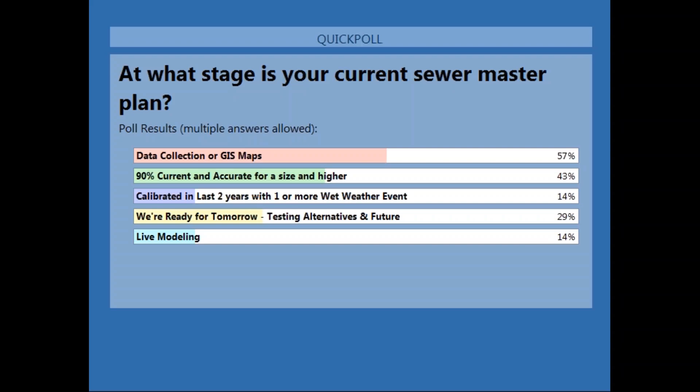Okay, all right. So we want to take this opportunity in the webinar to begin to describe some of the collection system master planning, some of the tools that Innovyze has to assist you, whether you're a system manager or a consultant tasked with that effort around your sewer collection. We see, as Innovyze, the concept of a digital twin being an important concept, so we'll introduce you to that topic. We'll talk a little bit about how to build a digital twin of your existing system, help you plan for some future growth, or assist you in your management and maintenance of that master plan.

Hopefully saving some scant resources. To do this, I think we're going to look at InfoSewer, as well as InfoSWMM, and how those two tools will help you in that capacity. So, what is a digital twin?

As a father of twins, a digital twin is our representation of that physical asset, typically hidden underground. We've created a digital element.

This concept dates back to maybe 2002, but Gartner, a research and advisory firm, has put it in the last 2 years as one of the top 10 strategic technology trends in 2017 as well as 2018. It's something that has increased steadily year over year. Wikipedia indicates it's just a digital replica of the physical assets, the processes and systems that can be used for a variety of purposes. I think that's the element we want to talk about: how in the short term that digital twin can help us not only with what assets we have, but how those perform and how operations and what we can do to provide insights into that.

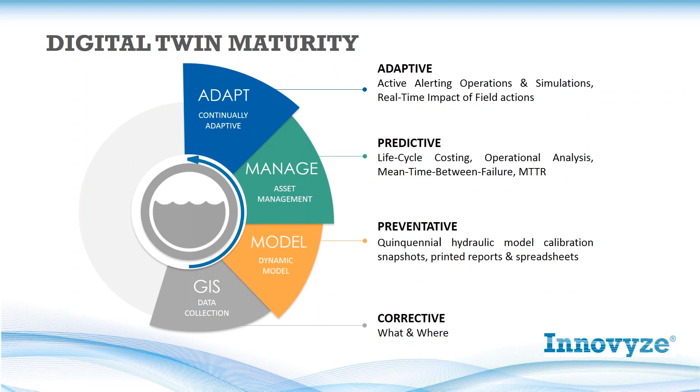Thanks, Matt. That was a great definition of digital twin. When thinking about master planning, I've seen that each master plan is really unique compared to the utility or the city that's involved. They all have their own goals and visions. Some might be technical, some might be more public facing and addressing the issues of the day, sometimes political as well. The regulations that the state, even federal, regulations are going to come out in that master plan in the way that it's been set up.

For example, we have a local report that indicated they pursued their master plan for the following reason: a new hydrologic and hydraulic model and guidance on the capital improvement needs of the collection system are required as part of prudent planning for the future and for the continued reliable and effective sanitary service to the community.

One item to note is that we've heard from our asset management folks here at Innovyze and the people we've reached out to in this market, and they've mentioned how important it was to have active master plans and asset management plans so that they were able to get better bond ratings and have a lower cost when it comes time to putting in their capital improvements. When they go to get the monies, they got much better rates if they had very current active management plans for their sewer systems.

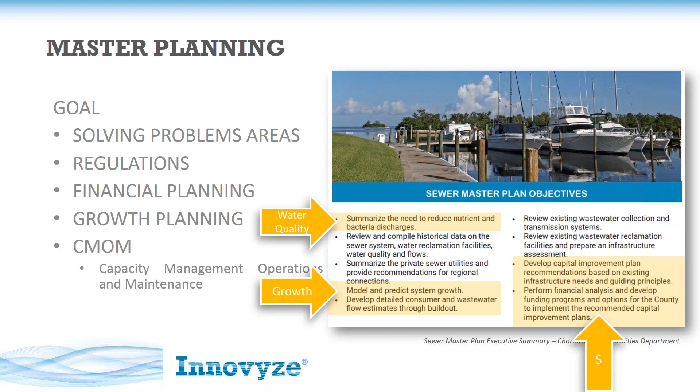And of course, ultimately, all of this master plan is used in that financial analysis that needs to be performed in order to make the improvements and keep high levels of service.

A sanitary sewer master plan, as we've talked about in that progression of the digital twin, is going to start out with a physical condition of the network. The assets are going to be built, hopefully built into a hydraulic model, going beyond GIS. The reason that's important is there's a new level of quality in the data that I find once it gets into a hydraulic model. A hydraulic model is going to impose on the system that the data makes sense relative to each other.

For example, there isn't anything wrong with a 36-inch pipe as a value for that field. However, if it was connected upstream and downstream to a 12-inch, it's probably a data entry error. And it wouldn't be called out until you've put it into a hydraulic model. Perhaps it will give a very strange result, or maybe even an error or a warning message. So we really like that the data gets into hydraulic models and it gets further fine-tuned.

Of course, the sanitary sewer master plan also comes into play for assessing the current state and then setting maintenance programs in place, and then using things like scenario manager of models, we can look at future planning for that capital spending.

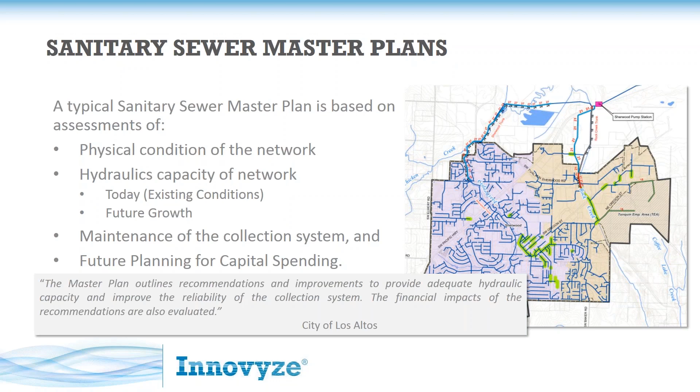At Innovyze, we have several products that operate in what we call the storm sewer flood family. This webinar, we're really concentrating on two of them though: InfoSWMM and InfoSewer. We've got Carolyn on with us to do some presentations of both InfoSewer and InfoSWMM along the lines of our subject today of master plans.

The first step, as I mentioned, and the base, is really collecting the asset information, what and where, and then taking it into a hydraulic model and evaluating it based on infiltration and inflows, the loads that go on this system. The infiltration inflow being the wet weather loads, they're more transient, right? We have dry weather flows, but we have wet weather flows as well.

In this image that we've captured, actually this is local, this is Oregon City, not far away. In fact, Matt lives nearby, I think just one side of the river versus the other.

You can see in this one that we've got some areas that are modeled, the ones in green, whereas the smaller sizes have been excluded from the model. They exist as part of the asset registry, but they're not part of the model. And this is something that I've seen over my time at Innovyze, that perhaps for financial reasons or model limitation reasons, we just model the large trunks and we don't model all the others. I would think that over time this should diminish because of the ease of building models.

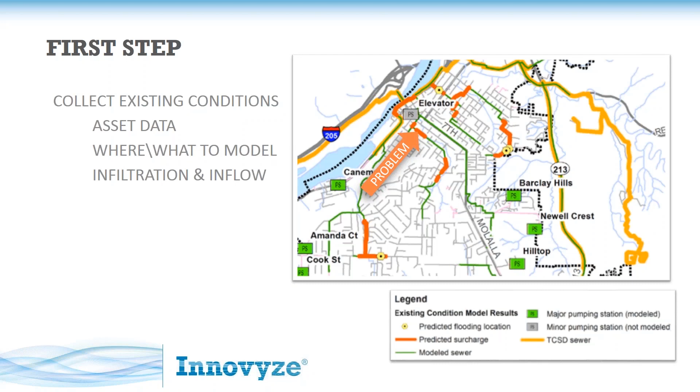At the upstream manhole of every link, we're looking at the depth of flow to the diameter of the conduit. Obviously, a d/D value more than one means that it's surcharged, and that's usually an issue in a sanitary sewer. Really, over 50% full doesn't leave us a lot of capacity for wet weather events that may come, and even future growth.

So instead of changing the pipe size every 5 years, which is quite expensive, you may anticipate based on your planning areas of growth, and initially perhaps you have really low d/D values, 10, 15, 20%, and then ultimately after several 5-year periods, perhaps you're getting more to the full capacity of the sewer system.

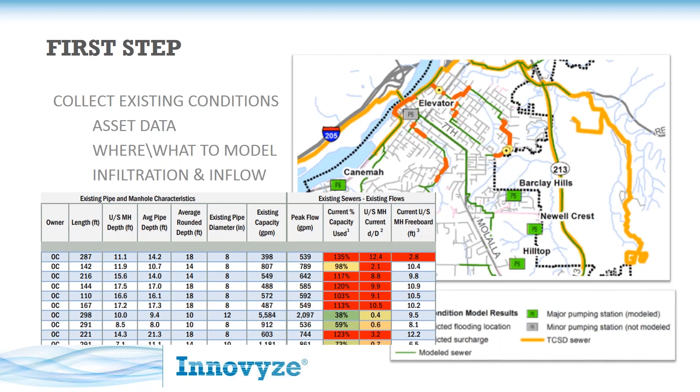So we're going to turn some time over to Carolyn to do a demo, especially based on this idea of building the model from GIS. She's going to do this in InfoSewer, and an InfoSWMM demo will follow later on in our webinar. She's going to demonstrate importing this information through a GIS gateway, which is a common tool to InfoSWMM and InfoSewer, look at allocation of loads, and then in a scenario situation, show a comparison of what will happen after we build out an area, looking at that idea of growth.

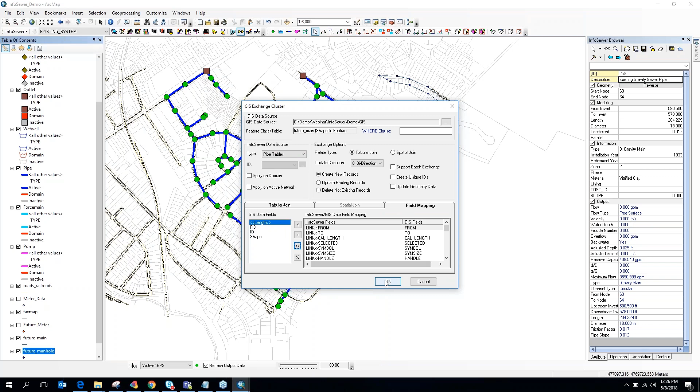So let's select create new records and do that one more time, that pipe table. I must have clicked out of it. So let's AutoMap. So let's select future main. Okay, and then we'll click load, and load is basically now we're telling it, so let's load these shape files in.

Okay, so it looks like our manholes were not imported. So what we're going to do is we'll go in, select edit, create new records. Oh, I had changed this to manholes. So let's delete these pipes. Okay, let's try that one more time. So we'll go back into GIS Gateway, and basically what I'm doing is just making sure there's no duplicate IDs and re-import.

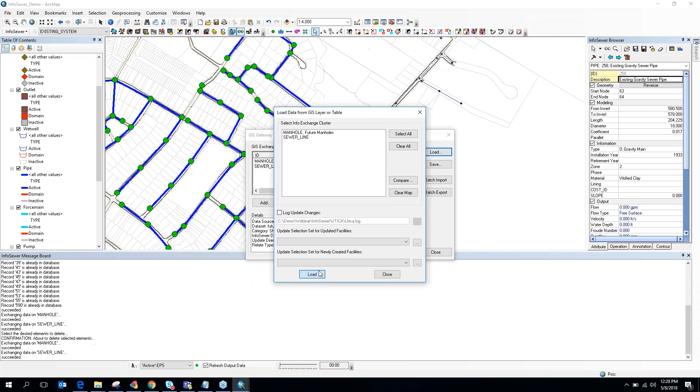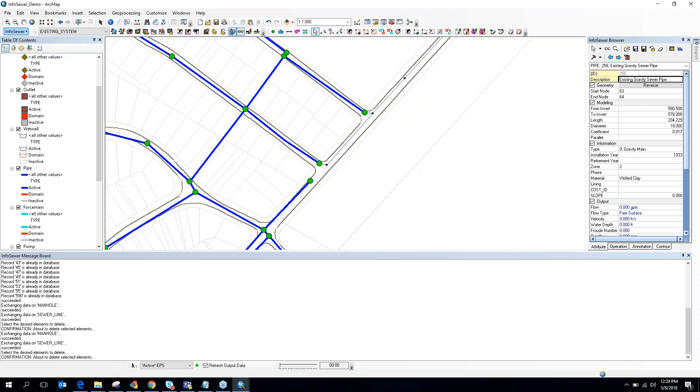So that was successful, and if I zoom out, it should add in, did I not change that to pipes? Let's, third time is a charm. So let's try that one more time. Make sure that I have manhole selected here and future manhole layers. So that's what I ended up changing. And then let's make sure we have edit pipe tables. Perfect. Okay, let's load that in one more time.

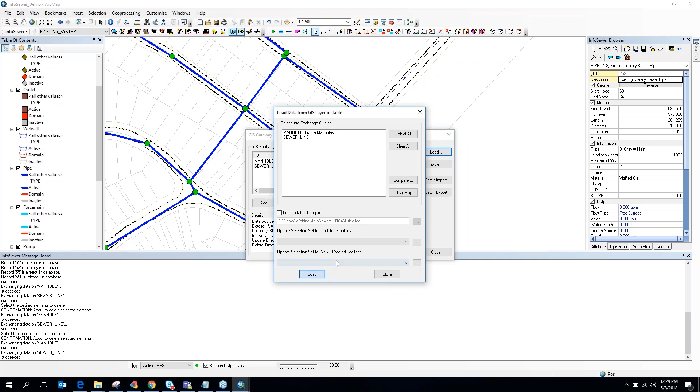Okay. So now if I go into each pipe, I can see that I have all my diameters, lengths, inverts. If I look at my manholes, I have no diameters or rim elevations added or any loads. So we first have to implement that into InfoSewer. So the best thing to do would be create a query to then establish what is the future system. And this section here is our future development.

So what I brought into the pipes were year of installation. So let's create a query for year of installation. So basically I'm creating this query to pull into the domain all pipes that we're deeming as going into the ground in 2018. So if I add that in and validate it, I can press save, okay, and then I can add that to the system. Make sure we have those year of installations.

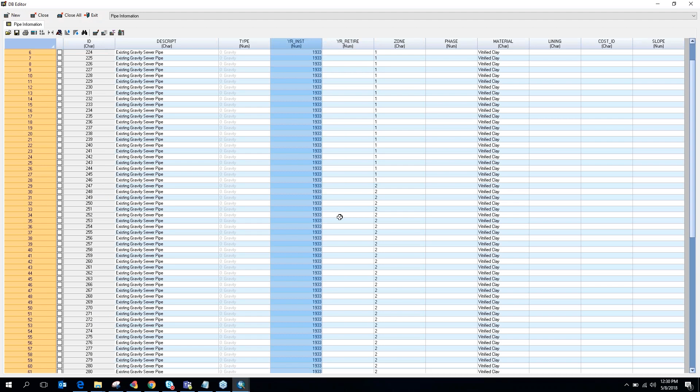So if we go to, so we are in an existing base scenario. So now if we go in and add that into, that should add it into the domain. And domain is basically a selection. So now I want to select those connected nodes. And we're going to go ahead and run our fill link connectivity, which would then connect the endpoints of those pipes to our manholes. So when I go in and select connected nodes, that will then add it into our system. So now I can basically create a selection set that is all of our future system.

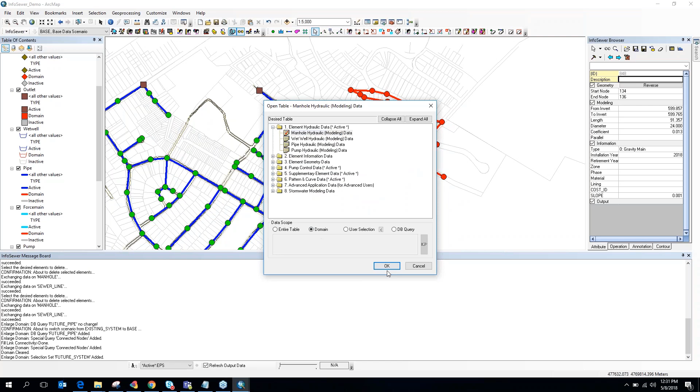Load the domain, say okay. If I clear that and add it, you should see it still adds up. So now I need to go in and add in that manhole information for that future system. So I'm just going to basically group edit and put in 4-foot diameter, and then I'm going to add in a rim elevation of 630 feet.

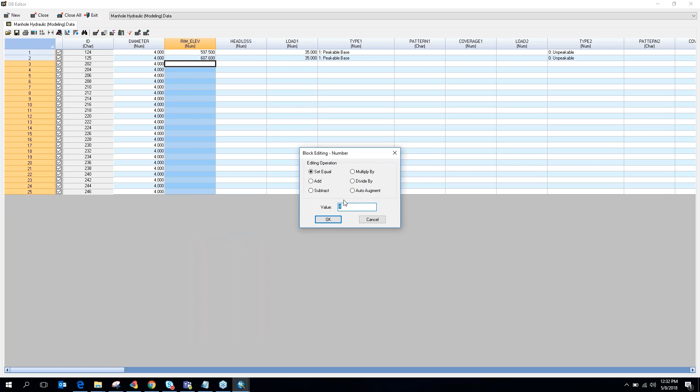So the last thing I have to add in is basically my loads. So I have no loads for my future system. So what I'm going to do in the purpose of the demo is basically use meter information and allocate the demands based off the meter information. And I'm going to use our load allocator tool that comes with our suite extension.

So the load allocator tool pulls up a toolbar, and in this toolbar there's several allocation methods we can use. I'm going to use closest pipe, which basically says it's going to allocate to the closest pipe and then either evenly divide it up to the manholes or basically allocate it to the closest manhole, which is what I have selected here. I also want to select apply to pipes in domain and assign loads to manholes in domain, because what this does is basically not override any of the loads I have in my existing system. I just want to upload any loads to my future system.

So I'm going to select future meter. I'm going to select dry weather flow, which is where my dry weather flow is applied in the GIS information, and then apply this pipe field.

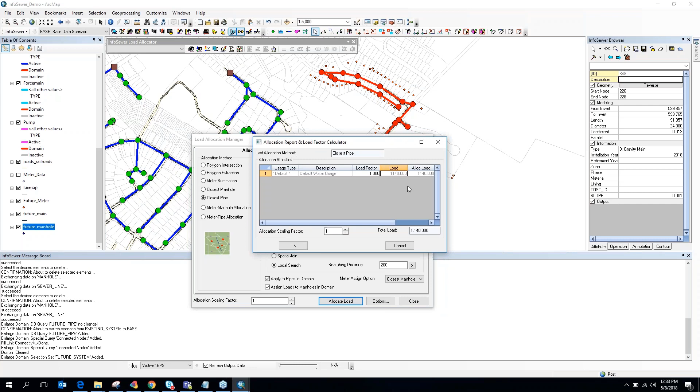And the pipe field, what it basically does is it will tell in the meter file, it will input what pipe that meter was allocated to. So you can go in and change that later if you'd like to. So I'm going to press allocate loads, and you can see I have about 1140 GPM of dry weather flow that was applied to my future system.

So now that I have done that in my base scenario, my next step is to then create a future system scenario. So I have an existing system scenario already created. So my future existing system, let's check to make sure the nodes are okay. So let's make sure that they are connected properly. So let's go into our existing scenario and take a look at this existing system.

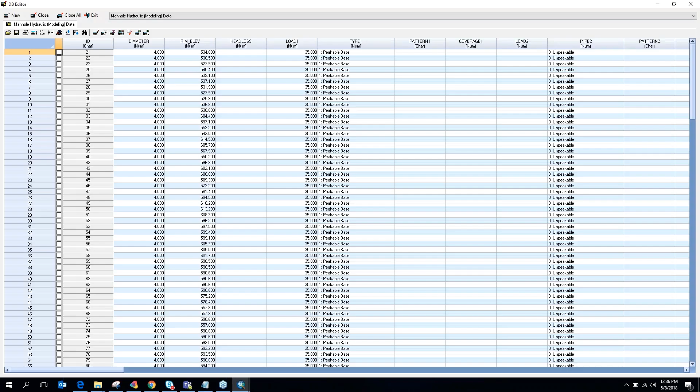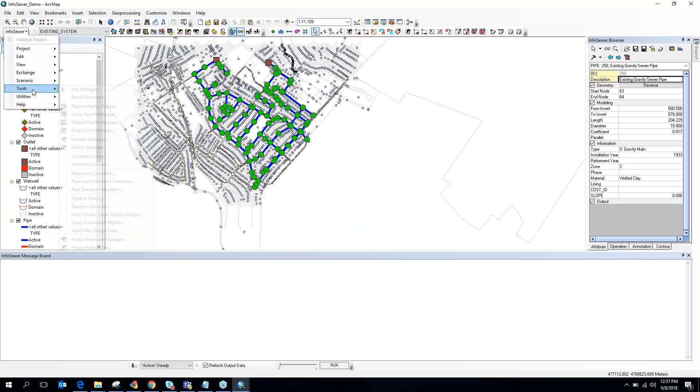So basically, I'm going to do that really quickly and import that information one more time. So if I switch to future main pipe tables, ID, and map over everything, and let's make sure that all the fields are mapped over. That's perfect. And then we'll load. Okay, so our future system is in place.

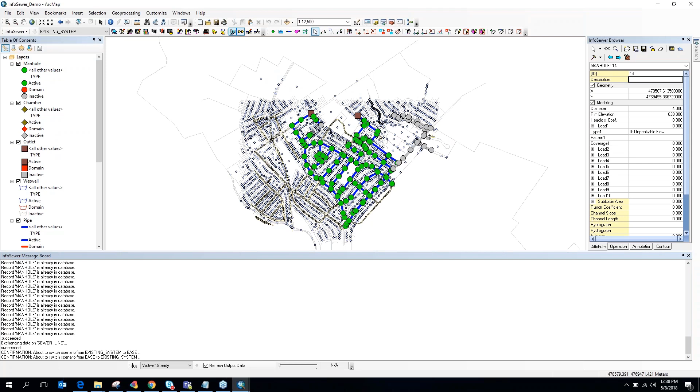And what I want to do is basically switch back to base and then our existing system. And that turns off all of our system here on the right. So what I'm going to do now is then create a future system scenario that will then activate this future system. So if I go into my scenario explorer and I create a copy of my existing system and then create a child to the base, I can call that future system. And then activate that scenario.

It's using the query set that the facility manager had. So what I first need to do is go into that existing query and then create a future system. So I'm going to add in my existing pipes because obviously I want to bring in those pipes. And then I would create a future pipe layer like I did before and add in just the pipes that were brought in with year of installation in 2018. Save, OK, and now I have a future query set. So then I can go ahead and activate that scenario. And you can see that now all the pipes are now active for that system.

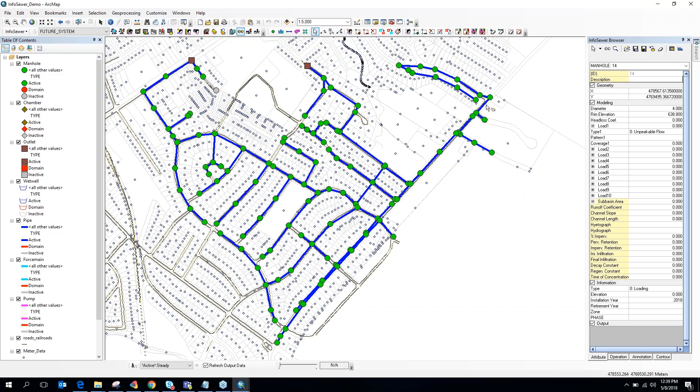So if I go ahead and run the simulation, actually, let's make sure that I added in all of the loads. I don't think since I closed it that I have loads added in. I don't. So let's go run through that allocation code one more time. Allocator. So we'll select dry weather flow and allocate demands. So I'm going to go ahead and run that simulation. And now we can go ahead and look at a report manager, oh, I ran steady state. So we want to run EPS simulation.

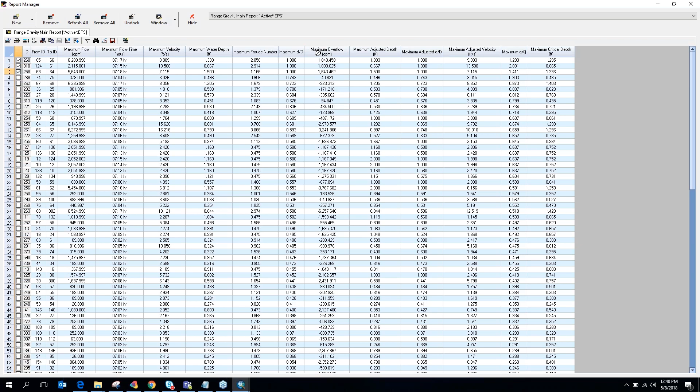And then we're going to go into the EPS range gravity main report, and then take a look at the d/D. So you can see here we have 3 new pipes that have reached capacity in our existing system. And the best way to look at that is in a selection set that we can create based off those 3 pipes, and we can close this table, go into the selection set and press add. There we go. So it shows those 3 existing pipes that now have reached capacity because of our future development.

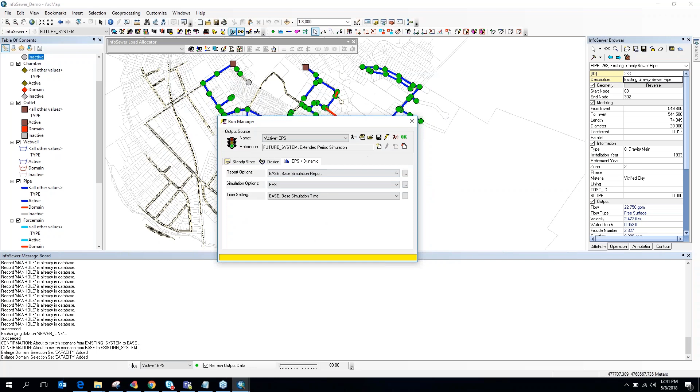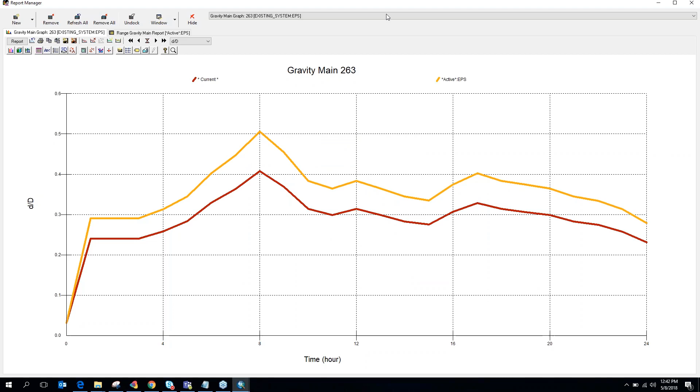So we can also go take a look at the outfall pipe directly connected to the outfall and see where we are in capacity with regards to the new development. So we're going to add in that existing system and then press OK. And so if I select this pipe here and I go to the graph, it will show me a graph showing me the d/D over time. Then I can go ahead and select my future system, and you can see that I have a little bit of increased d/D at that outfall. I'm still looking good, but that future development has added some capacity to that pipe.

So the last thing I wanted to show really quickly was, after you've gone through that exercise and seen that you do have pipes that have reached capacity, you can then use our design tool that will select based off an analysis criteria. So 12 inches or less, if the pipe is above 0.5 d/D, then it's going to pull that in as a pipe that needs to be replaced.

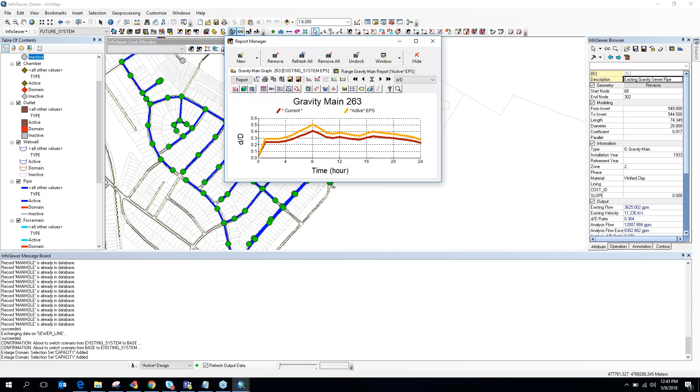Then you can use your design d/D, which basically says you want to design the new pipe to be within these capacities. And then the replacement cost curve will give you a cost per linear foot that will cost out how much it's going to cost to replace that pipe. So if I go ahead and press run, and I go into my run manager and select new, I have a new report that's created. And then I can take a look at that.

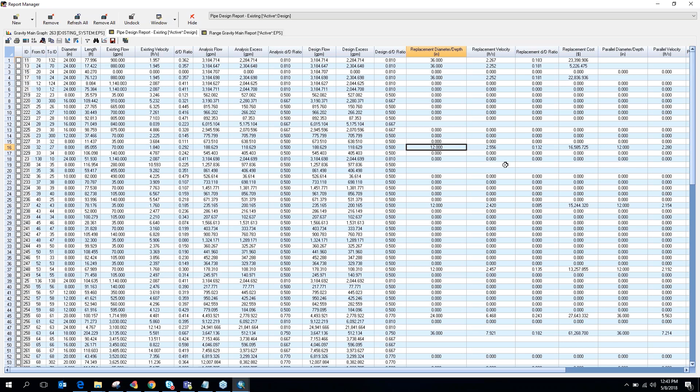So you can see here that pipe 228, InfoSewer is recommending that it should be replaced based off that d/D analysis. And the replacement pipe should be 12 inches, and the total cost for that pipe should be about $16,000. So I'm going to turn it back to Tony to continue going through InfoSWM.

Great, thanks for that InfoSewer demo. Actually, I didn't really mind the repetition because I'm pretty new to it, and it really makes me think about how awesome the scenario manager is. We use a scenario manager for future conditions all the time. It's really quite logical, but I see the scenario manager in InfoSWM and in InfoSewer as really being a tool where you can be quite creative.

So not only do we look at population growth, tying in a new system, but it could be quite diverse. For example, let's say you have an area that has a lot of septic system failure. There's a lot of groundwater contamination because of old septic systems. You're deciding, okay, we're going to sewer this area, we're going to try to make some improvements. Well, it's quite easy to allocate loads like we've shown and get a handle on that.

For example, what about patterns in the flows? Let's say you have an option: send the sewage to a regional facility or one of your own that has capacity. Maybe they've got different costs per million gallons that you're treating. Well, if you could add lines and divert, then this is really going to be beneficial. A scenario where you're just changing flow directions, for example.

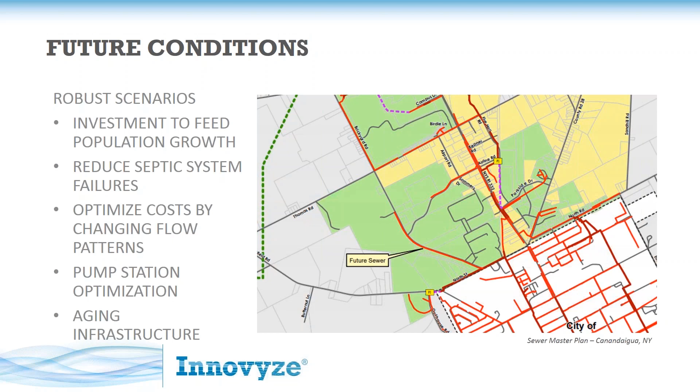So we've talked a little bit about InfoSewer, you've seen a demo, but we also have InfoSWM. How are they the same? How are they different? Well, I just have a few things to mention about that. So they're both obviously for sewer collection systems. InfoSWM has a much stronger stormwater component, with many different hydrologic methods that can be used.

While both of them operate as a full GIS integration, an extension to ArcMap, and can handle city-scale models, it really comes down to the hydraulic analysis as well as the ability to handle stormwater in a sophisticated way. InfoSewer uses a steady state peaking factor type approach. It's really good for sewer systems, the design of them, when you're not expecting lots of surcharge.

In the case of InfoSWM, it's using the EPA SWMM engine, SWMM 5, and it's able to model full dynamic waves. So the storage effects of conduits, system backwater, even flow reversals. So if it's a complex sewer with lots of loops and so on, then InfoSWM would really be the most appropriate product for you.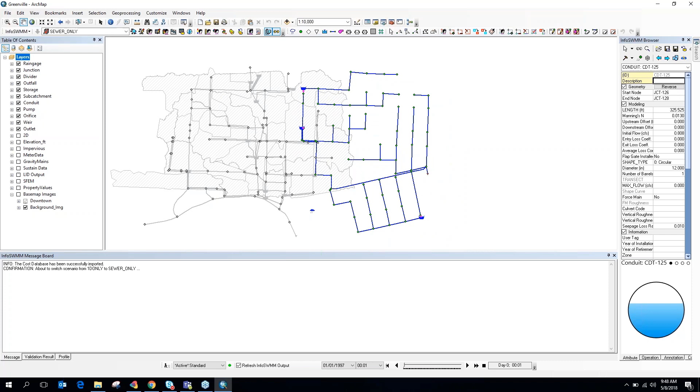One thing before I start: you can actually import InfoSewer, H2OMap Sewer, and InfoSWMM or H2OMap SWMM directly into InfoSWMM. So if you have an InfoSewer model that you then want to apply to InfoSWMM, you easily can import that.

There are just a few things you'd want to check while doing that import. First, flow units - make sure they're set up the same way as in InfoSewer, which you'd select here. So if the loads are in GPM in InfoSewer, make sure GPM is selected here in InfoSWMM, because it won't automatically convert it. You also want to make sure your pump settings are set up properly in InfoSWMM to correlate with InfoSewer.

If you have any short pipes in InfoSewer, you can use our conduit time step for conduit lengthening option - our default is 5 seconds. The best way to confirm everything's been imported properly is to run both models and compare system loads in InfoSewer to total inflow in InfoSWMM. That'll give you a good understanding that InfoSewer has now properly been imported into InfoSWMM.

InfoSWMM also uses an enhanced form of the latest EPA SWMM simulation engine, and it uses these process models. So if you're just doing a sewer system in InfoSWMM, you can remove rainfall runoff and just select dry weather flow, RDII, external inflow, and flow routing. It will just run these process models and take a look at those while running the simulation.

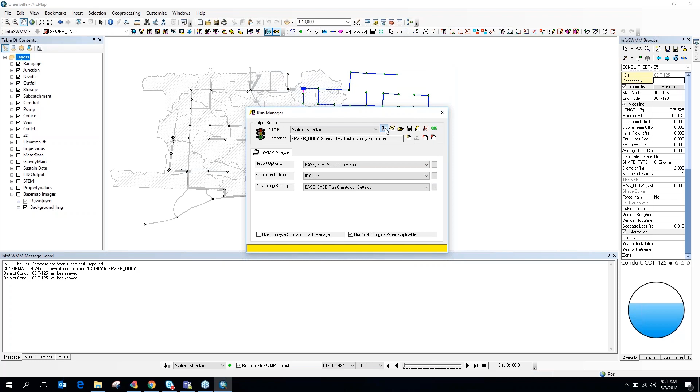So if I close this and go ahead and run my simulation, I will now have results just for my sewer system here. Let's take a look at what information we actually have set up on our manholes, and then check to see if we have any flooding in our system.

If we go ahead and select a manhole - dry weather flow is applied in InfoSewer to the manhole hydraulic table, and you have about 10 loads that you can apply there. It's a little different in InfoSWMM, where you'd select the hammer tool drop down, select inflow, and then you have 3 tabs: the first is external flow, then dry weather flow, and then RDII. So you can have an RDII RTK hydrograph applied for each manhole.

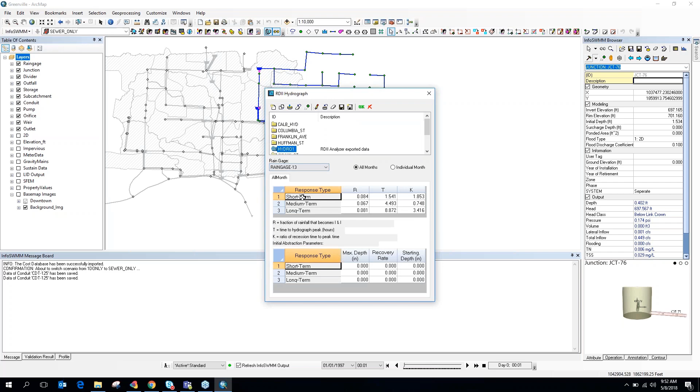You would apply basically a rain gauge, so that's your observed data, and then your RTK parameters that you have calibrated specifically to the observed data that you have for this manhole.

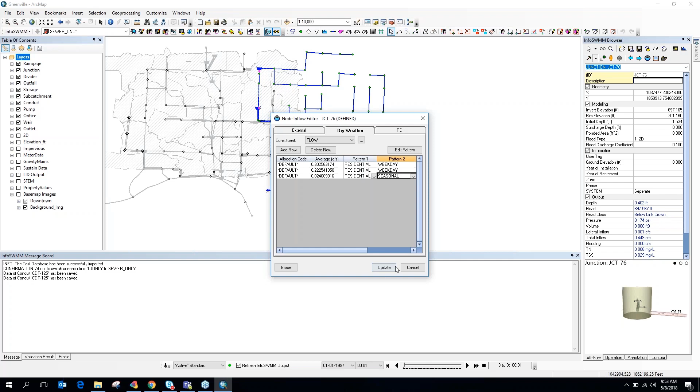Then you can go in and apply dry weather flow. You can see here you can have multiple rows of dry weather flow applied to each manhole, in this case because we have a couple weekday and seasonal patterns. But if you had, let's say, a residential flow, employment, or commercial, you can all set that up with its own allocation code, its own dry weather flow, and then input its own pattern there. So you have 4 patterns that you can implement to each dry weather flow. That's how that information is applied in InfoSWMM.

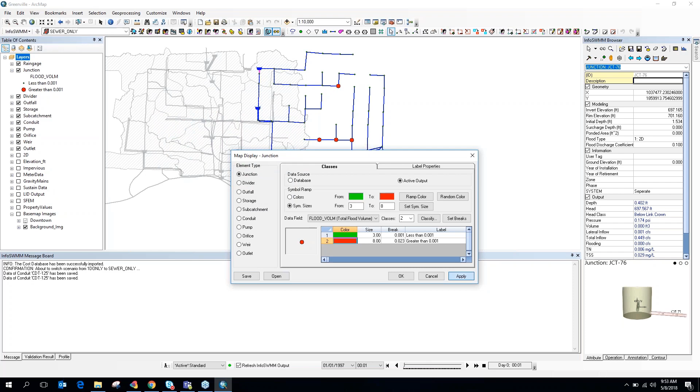Now let's look at our system and do a little analysis to figure out if we have any flooding. I'm going to use a map display option here and classify 2 breaks, just to see if we have any flooding. Obviously it's a sewer system, so any flooding is bad. Let's apply this with a red color, so anything higher than 0.001 we're going to apply. You can see we have 5 locations in our sewer system that are experiencing flooding.

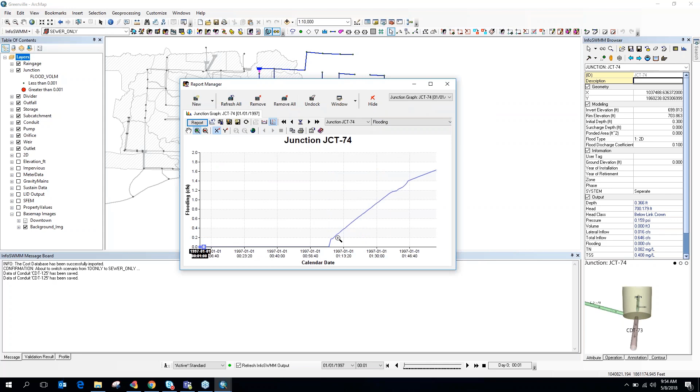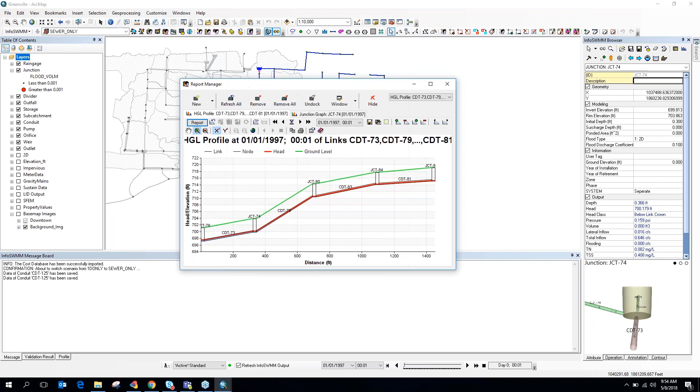We can look at that in a couple different ways. If I select the manhole and open up my graph, I can select flooding, and you can see that halfway through my simulation I start to experience flooding, which may be because my pipes are too small in that location. The other thing I can do is go into my report manager, select new, go to my graph report, select hydraulic profile, then select my manholes and open it, and it will open up my hydraulic grade line.

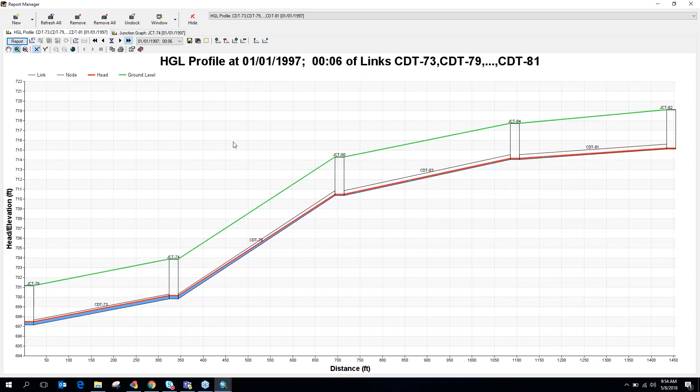Now I can actually play a little video to show how my flow is flooding. You see here in junction 76 and 74, I get to flooding a little earlier than the rest of the system. So basically at this point, we got to figure out what size pipes we need in this location in order to

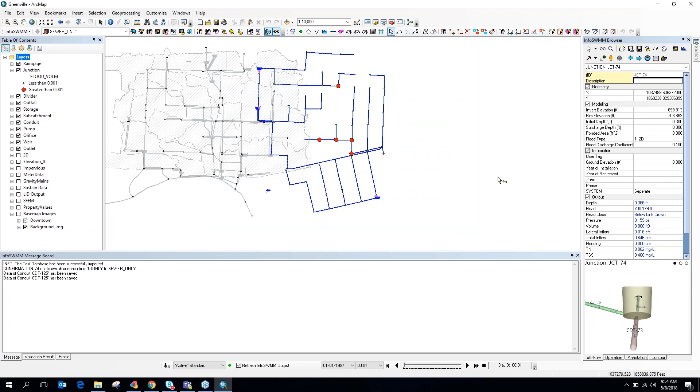remove this flooding. So I'm just going to focus right here in this area, create a new scenario, upsize these pipes, and then rerun the simulation to see if we remove the flooding. Let's take a look. Our existing pipes in this area are 6-inch, and we have an 8-inch here. So if we want to upsize, let's just go with 12. That's upsizing the pipe pretty high, but we obviously want to do that to any downstream pipes in our system.

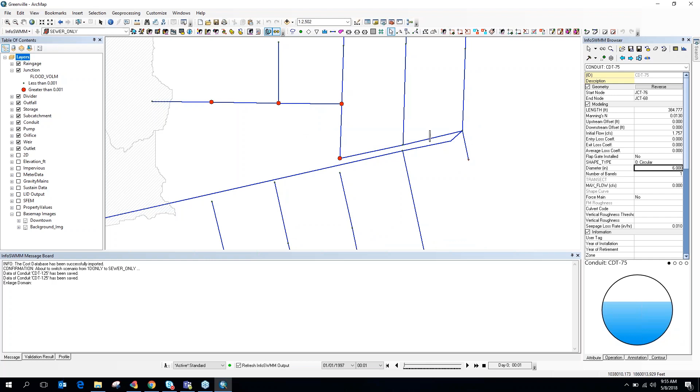So what I'm going to do is use my domain manager again and select in my domain that pipe segment. Let's just select it, it's all in the domain, say selection set, just like we did in InfoSewer, and say replacement. Say okay, load it, say yes, and then okay.

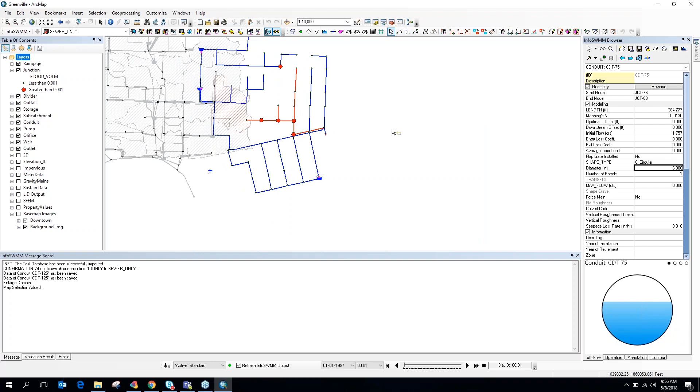Now we're just going to create a new scenario. If I go into my scenario explorer, I can basically copy this. This time I actually want to create a child to this sewer only scenario, because I want my new scenario to inherit everything that sewer only scenario encompasses. So I'm going to paste child and call it CIP, Capital Improvement Plan.

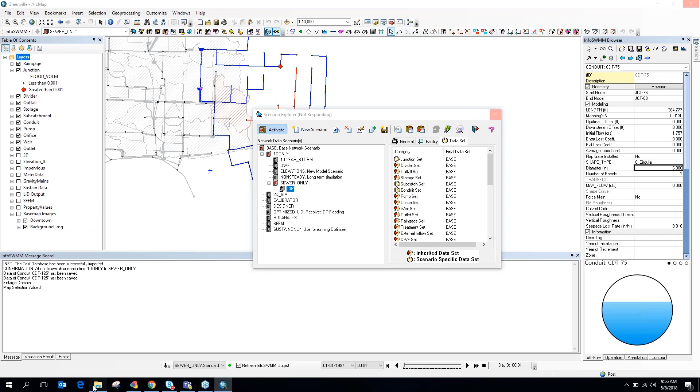So I'm going to go ahead and activate that. It did not like that. Let me reopen up InfoSWMM. Sorry about that.

So basically what I'm going to do is create a new scenario called the Capital Improvement Plan. In InfoSewer, I showed you that you would create a new facility to activate these pipes, and since I didn't really change anything in the existing system, I didn't need to create a data set. But in this case, I have to create a data set in order to change what those pipe diameters are. I want to keep the integrity of the sewer only scenario, so I don't want to change any information in that scenario, but I want to create a new scenario and analyze whether upsizing those pipes to 12-inch will remove that flooding. So I'm going to go ahead and claim.

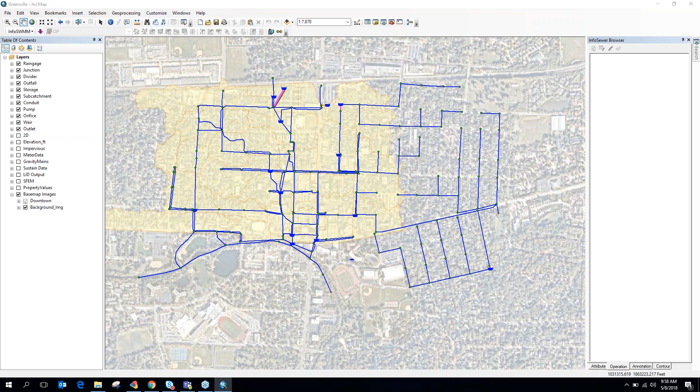And it's going to take me back to where I was before. So let's close this and bring on all my tools. I actually accidentally selected that subcatchment, so let's reapply this replacement. If I clear this and add it, it shouldn't bring in my subcatchment anymore.

So what I'm going to do is go back into my scenario explorer, activate my base, and go into my CIP. Here I want to create a new data set for conduits so that I can apply new diameters to that pipe segment and not change it in the sewer-only scenario. So I'll clone my active scenario and call it CIP, say OK, and then activate that. Now I'm active in the CIP scenario with a data set called CIP.

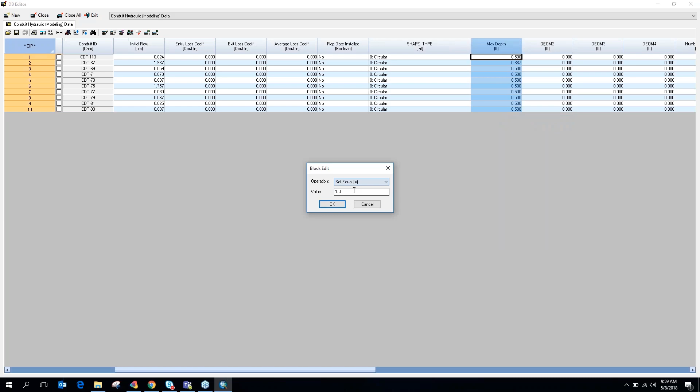So I'm going to go into my data table, select domain, and it's going to bring up just those pipes that I've selected in the domain. I'm going to go over to geometry and upsize those. This is in feet, so I'm going to set it equal to 1, which would equal 12 inches. So I'm going to save that.

And then now basically I'm going to go in and just run the simulation and see what that impact will do in this area.

So if I go back into my map display and set that up, you can see already the groups that are set. Now I don't have flooding in that area anymore. I still have flooding in this one spot that I would have to look into. But let's go in and look at the hydraulic grade line again.

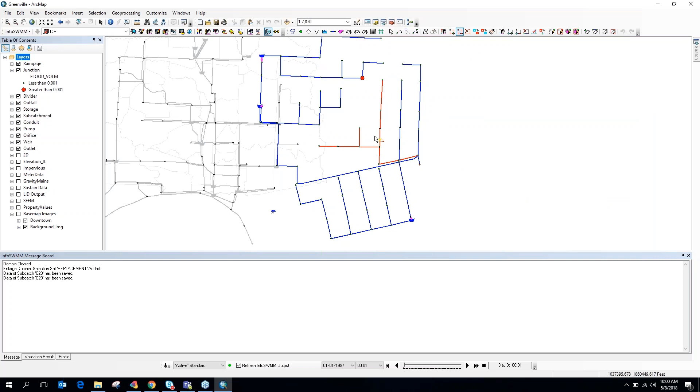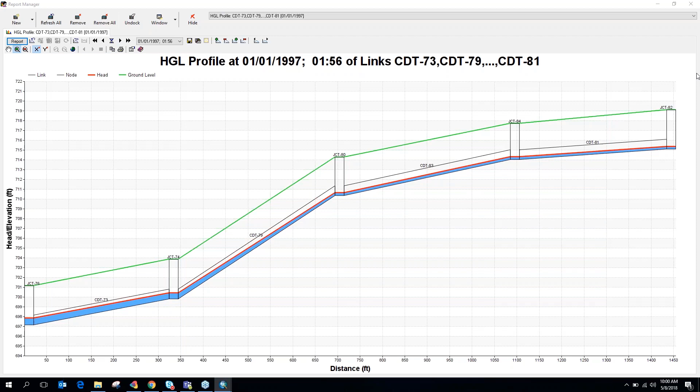Let's change this to 5 and play it. So you can see here my pipes don't even surcharge. So we've taken care of the flooding in that area by creating a new scenario, creating a new data set, and then rerunning that simulation and taking a look at the results.

So I think now Tony is going to take over and talk a little bit about RDII Analyst and how you can calibrate observed data and then basically implement those RTK parameters and push it back into InfoSWMM.

Great, thanks again for the excellent demo. I'll be a little brief on this for the sake of time since we've used up our hour already. By RTK, we're talking about triangular unit hydrographs that relate the rainfall to how much flow is going to be in your sewer. Essentially, you want a really good fit—you want a good relationship between the rainfall and how much RDII flow you have.

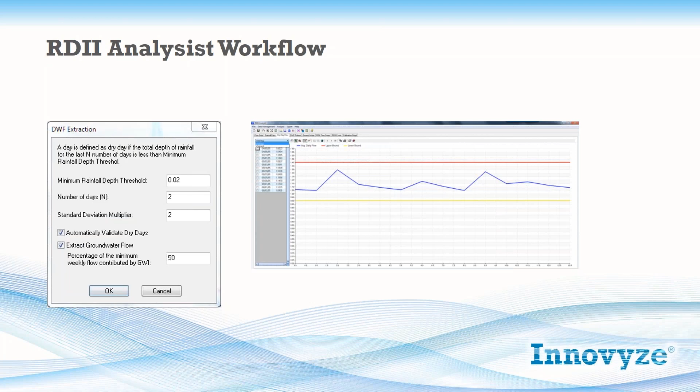Well, the process in the RDII Analyst is to take in flow metering data, and in that flow metering data, you want to get it down to what's dry weather flows, with the rainfall period being covered as well. Obviously you know when you have dry weather periods and when you have wet weather periods. You can extract essentially a dry weather flow and then develop a dry weather flow pattern.

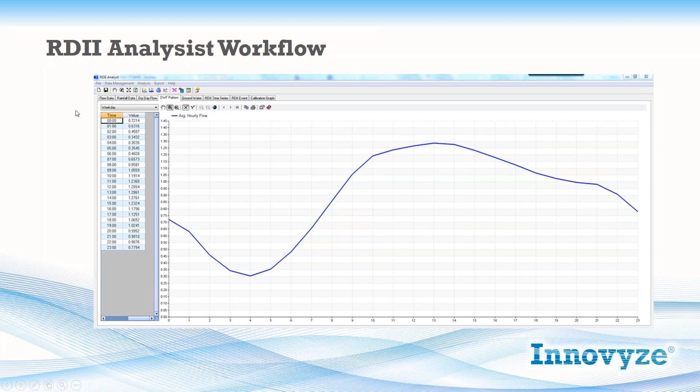And this input then gets derived into this pattern. Here's the shape we're talking about, like hourly peaking factors. And we create the RTK response—this blue is the corresponding RDII flows from creating RTK parameters based on the rainfall and having extracted the dry weather flow out.

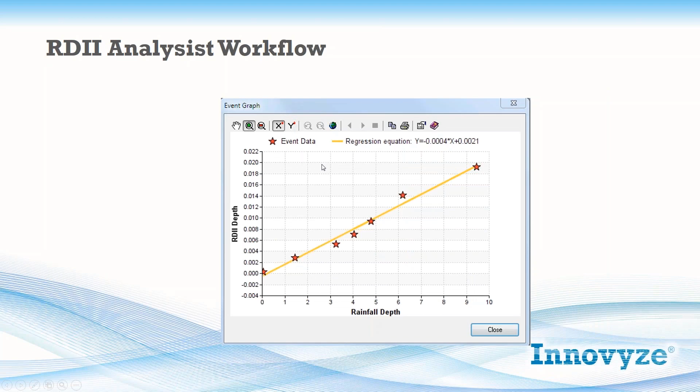This is a powerful tool. Other tools exist—for example, EPA SSOAP, it's similar. But this has been integrated with InfoSWMM in such a way that you end up with the RTK parameters that yield a good fit.

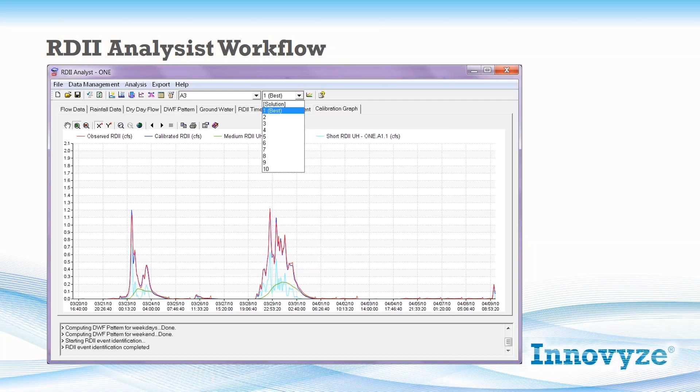It does it by running many tests and then evaluating the goodness of fit. So you end up having, with your observed and your calibrated data, you can visually see through all of your sets of R, T, and K parameters which ones are good ones to use, because the wet weather response in a sanitary sewer, especially an older sewer of certain materials, can sometimes be significant. I've heard of 10 times dry weather flow in the worst of sewers. So it's not something you should just ignore and think all my sewers are tight and don't have any infiltration and inflow.

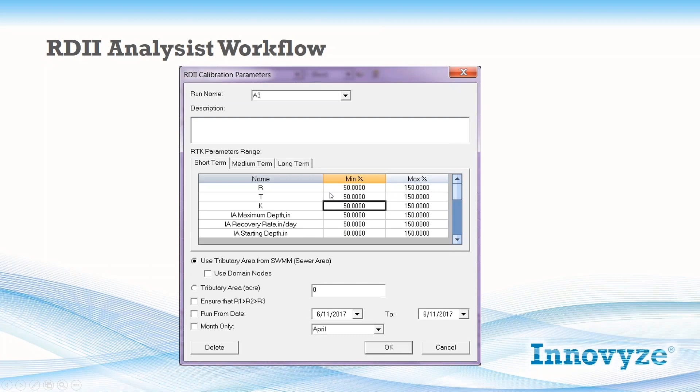So in the end, you end up with R, T, and K parameters and perhaps optional abstraction and storage values as well. You give it a range for its iterations, and you can use those in your model.